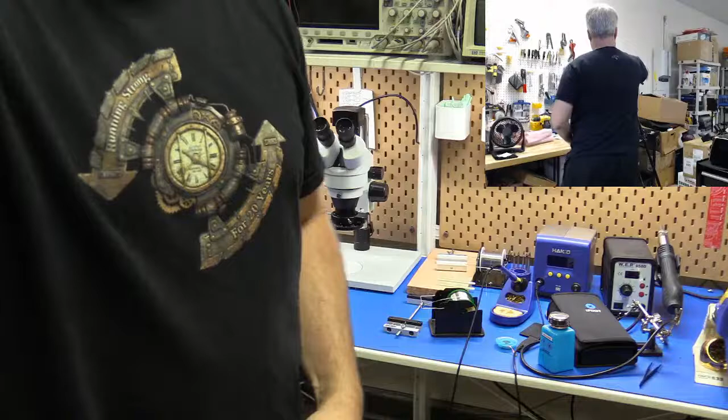So, I hope everyone can hear my rambling okay. I'm going to switch over cameras and we'll start unpacking. Okay. I still think it's kind of weird how you can see one camera and the other. Okay. There. Okay. Hopefully I'm coming through okay from the webcam, even though my back's to it.

This is the big box. Let's see how this goes. Okay. I just love packing paper. Yeah. Okay. Yes, so here we go. Bags of parts. They still look pretty good.

So the Printalyzer densitometer assembly is made up of 4 pieces. There's the top, the main body, the lower body, and the bottom cover. So this looks like the main body. Another bin of those. Oh, another bag of those. Yeah, this is the top piece. I affixed a graphic overlay to this to make the top of the device that you actually see. More of those. These are the bottom piece of the device. Plenty of those. And the base.

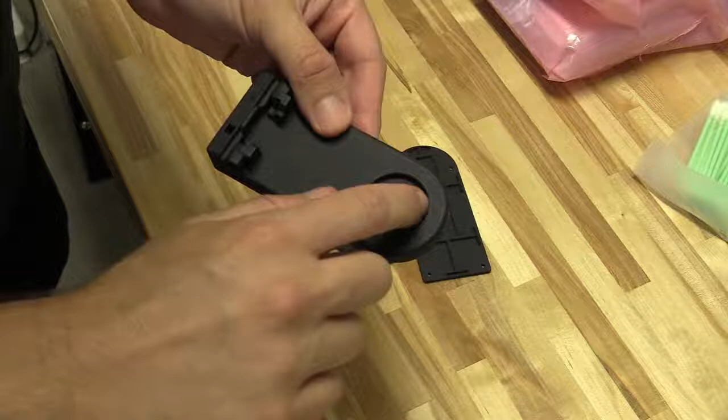So, over here, these are all the parts that make up the unit. One last-minute change that I made. If you maybe can't see in here, this is where these rings go around. I added a little inner groove in here. So when I was putting these together, the problem is the inside edge of this depression kind of had a little bit of a bevel just from the material process. And I was having trouble getting these things to actually fit all the way.

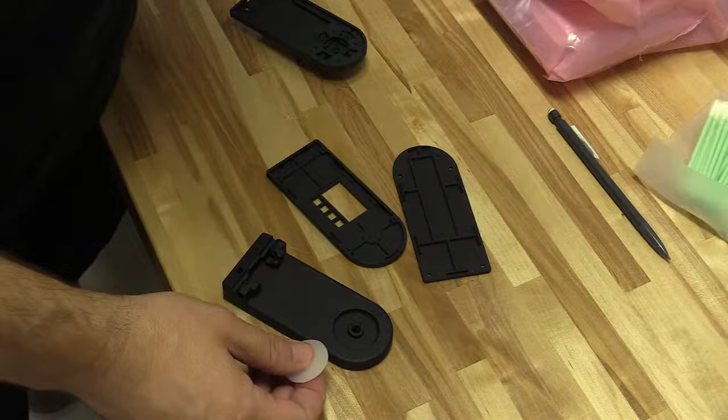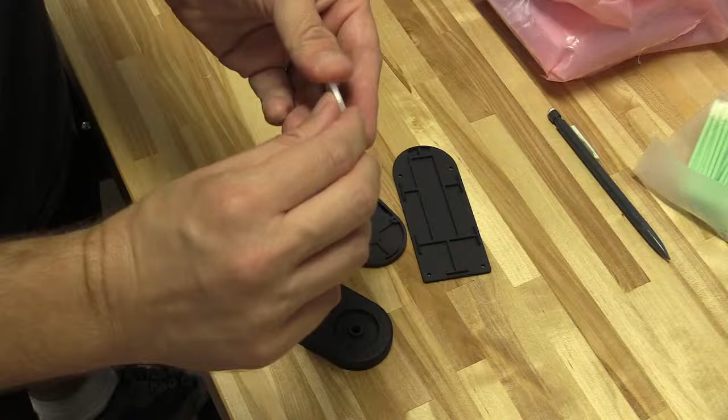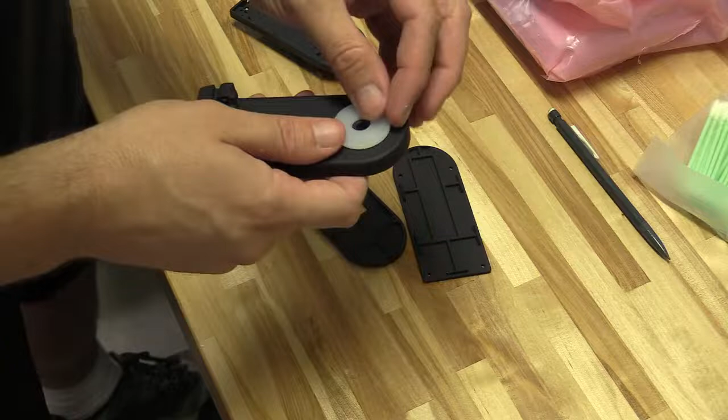So what I wound up having to do is come up with some sort of a way of sticking this on the end of a drill, spinning it around real fast with a file, and rounding the edge just to make it fit. And I didn't want to have to do that, so I added this little inner groove here, which looks good, that should hopefully avoid that problem. And we'll know for sure once I start to actually glue these together.

Okay, and then I also made these little pieces, the bottoms of some of the springs come through here. I made these a little longer and added a little pocket so I can blob some silicone in there just to help hold the bottom of the springs in. It's another last-minute change I made. So, let's see. So that goes together like that.

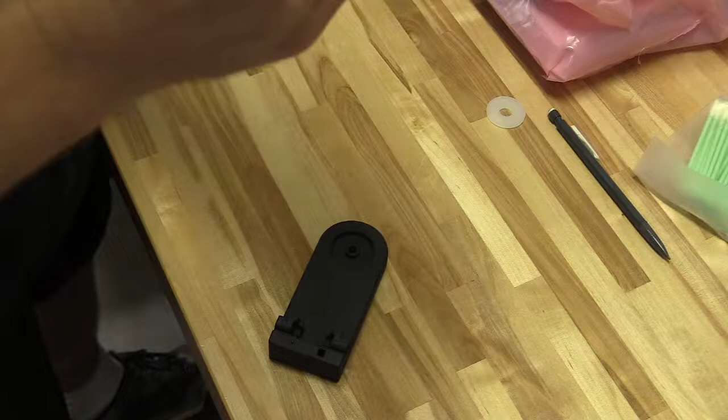Top goes together like that. Now, when I was going back and forth, driving myself crazy about manufacturing for this, some places would say something like, "We're okay if it's plus or minus 0.3 millimeters. We're not going to care about your problem if that's the case." Well, you do that in one direction on one part, another direction on the other part, and all of a sudden these pieces that are supposed to mate together overhang and none of the screw holes line up. So that's important. So this fits together pretty well.

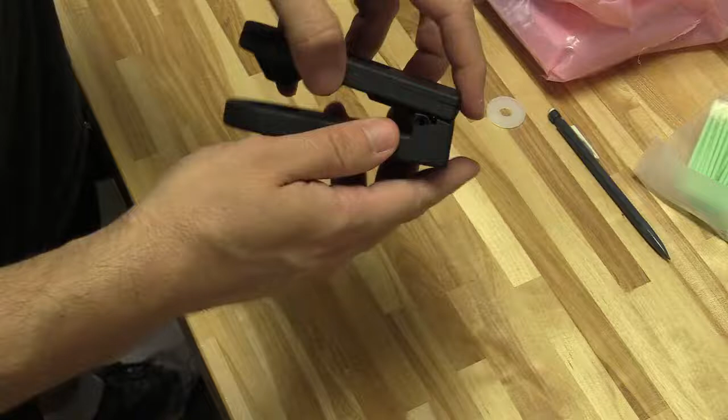I actually made a bunch of weird design kinks in here, these little features here and around here, so that this thing would rest down and kind of lock so that when it was closed it wouldn't have any side-to-side play. Very important if you want repeatable transmission measurements. So, big thing we need to find out now is do all the parts fit? That's one thing that's worrying me a little bit.

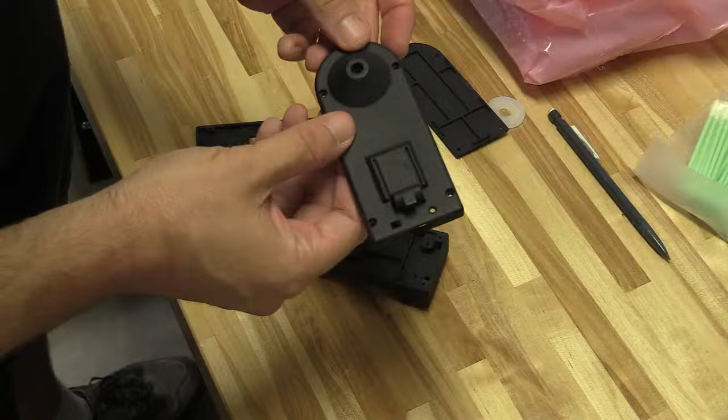So one thing that's always a challenge with these is getting all the tolerances on everything perfect. You have all these little screw holes, all these little bits and pieces, and everything has to go in just perfect, and you wind up iterating over and over again. Oh yeah, here's another thing that I did. I slightly thickened the amount of plastic between here and the inside of that pocket so I could use slightly longer screws. I discovered the screws I was originally using were too short. In the final pre-production devices, I used some washers to make up for that plastic being a little thinner. The final ones, I shouldn't need it.

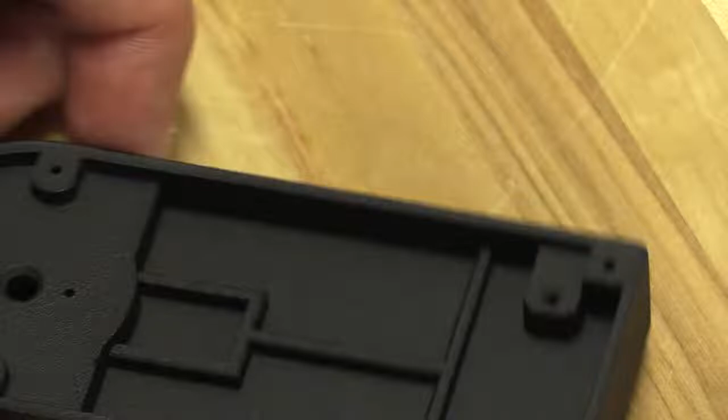But yeah, mostly what I'm worried about, let me zoom in, is, and I won't really know for sure till I start doing some assembly, whether these screw holes right here are actually big enough or not. If they're not, they're still probably big enough to tap. If I have to tap them, I can. I just hope I don't. The rest all look good.

So if you want to know why 3D printing is such a benefit to a device like this, first of all we have the whole hinge, but also the sensor cone right here. This isn't just a cone of plastic. It actually has these 4 channels on the side that come up to where the different LEDs are, and they shine down at a 45-degree angle to hit the bottom target, and that's much easier to do with 3D printing. And then in the middle, we have a stack with a diffuser and a UV-IR filter, and then the circuit board goes on top. So aside from a minor concern over those holes, which I can work around if it is an issue, and it may not even be an issue, this actually looks pretty good.

Of course, the one thing I'm always a bit nitpicky about is whether these will fit properly in here. They do around the edges. They might need to be pushed down a little bit. I'm a bit hesitant to push something in just because it may be hard to get it out. But I could actually try gluing one in. So let me go get one of the final rings.

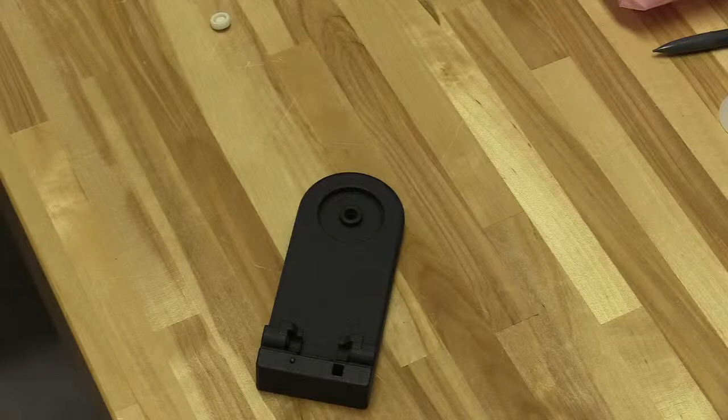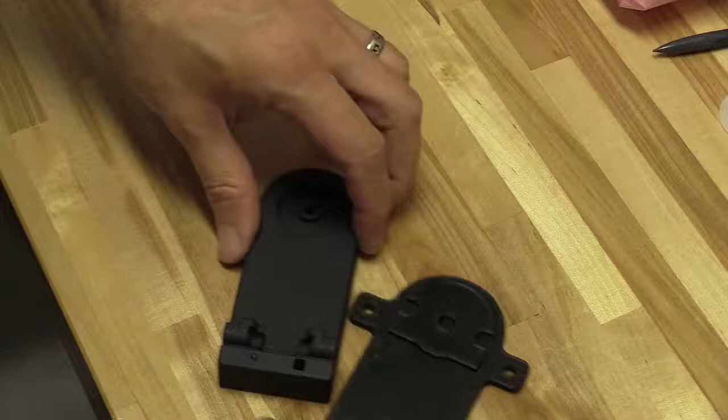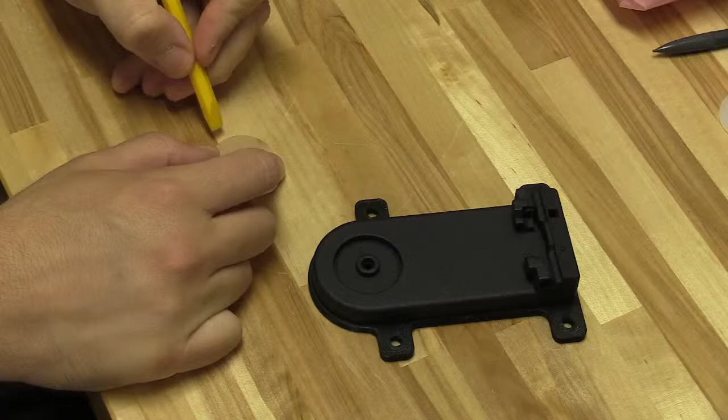Okay, let me zoom out a little bit. Okay. Let's... little jigs. In fact, I even made a jig specifically for this. Anytime I need to hold one of these devices in a specific orientation, I make a jig. So we've got this jig right here that's designed for this to sit on top, so I can bang on it and not have to worry. So, got a few things we got to do to put this together. Obviously, when I'm doing this for real, it's going to be done in quantity, in bulk. I'll have a whole bunch lined up, but we're just going to do one right now just to see how it fits.

Okay. So first we're going to do this outer ring, which is relatively easy. So this plastic here has two sides. One's completely matte, one's shiny. The idea is the matte side is up so we don't track our fingerprints. So this is going to be shiny side down. So to put the outer ring in, we just dab a little ring of super glue around there.

Take this, put it over, and then press it. Okay, that is not good. Run into this problem before. What the heck? Okay, that inner part is too big. Yeah. This is going to be a problem. It actually makes me wonder if the middle piece will actually fit too.

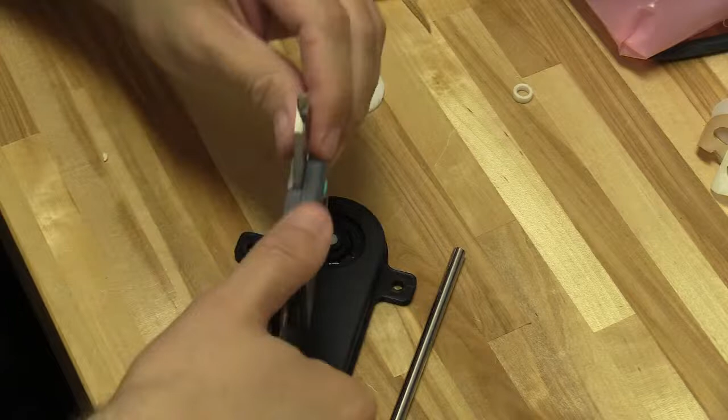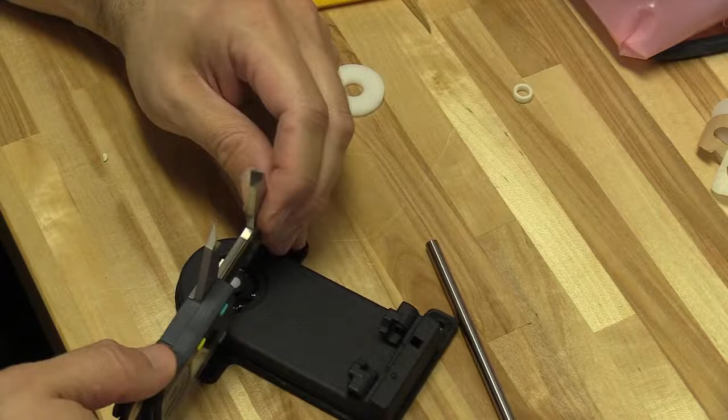So let's see. This ring is supposed to be, I guess, either 30 or a hair under. That's 29.8 on the outside, 10.05 on the inside. This pocket here is 29.63. Yeah, 29 and a half about.

So this is wider on the outside. And the in part here, that's 10.1, 10.2, and the inside of this is 9. Yeah, these dimensions are off. There's no way that's going to go in. So

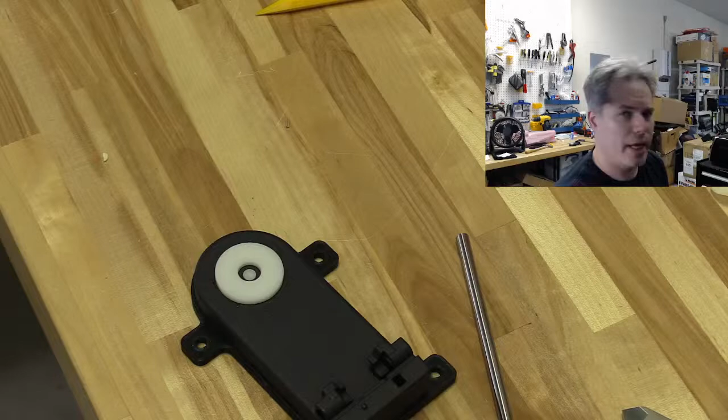Okay, so now what we're going to do is I'm going to bring up the actual CAD models for this thing, which should just take a minute because Fusion 360 likes to make you sign in fresh if you haven't used it in a while. So this will just take a few moments. Now it's going to send a code to my phone.

Okay, I'll be switching over to the computer desktop in just a moment. This isn't the computer I normally run the software on, but it's the computer I have in the lab.

Ultimately, though, this means two things that I would rather not be the case right now. It means that at least for the bottom half of the enclosure, I am not going to be able to start production for at least another week or two. The top I should have no problem with, but we'll see.

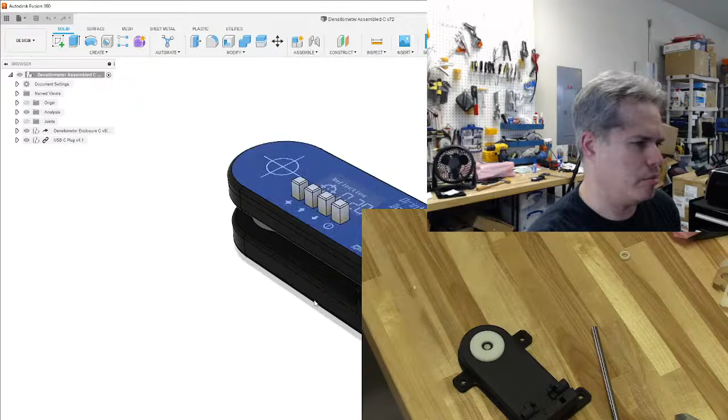Okay, so now we're over to the desktop. So, let me resize this so that it fits nicely. Let's see. Yeah. Shut off the video camera for now. Actually, no, we'll leave it on. We'll leave that on in the corner.

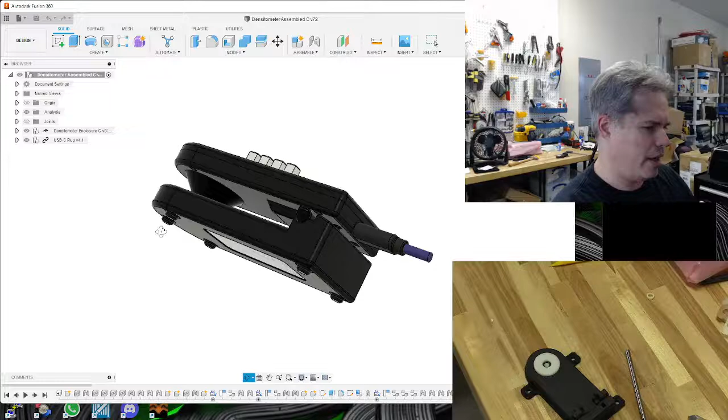Okay, so here's what we're going to do. I've got Fusion 360 up here, which is the CAD model for the device. I sort of have two versions of the model. This is the one that has all the parts in it. I also have one without the parts, but we'll keep this one for now. So we need to figure out what the dimensions are supposed to be and what they actually are.

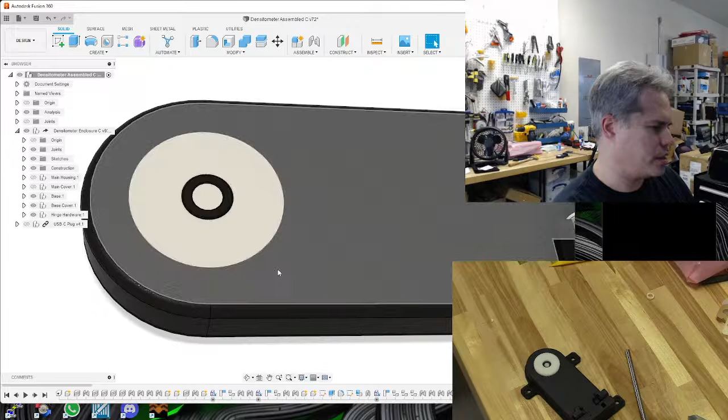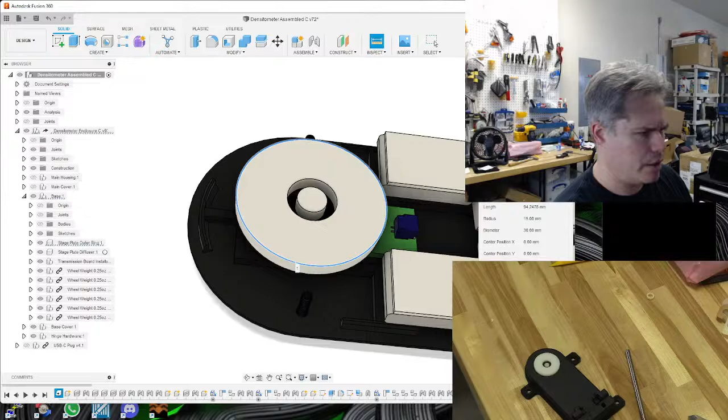So we'll take off a few pieces here, and this is really what we're caring about right now, this in right here. So in the base, if we take the outer body out, this outer ring is supposed to be a diameter of exactly 30 millimeters, and this inner piece, actually we don't care about the inner piece, that actually worked. So it should be 30 on the outside and 10 on the inside.

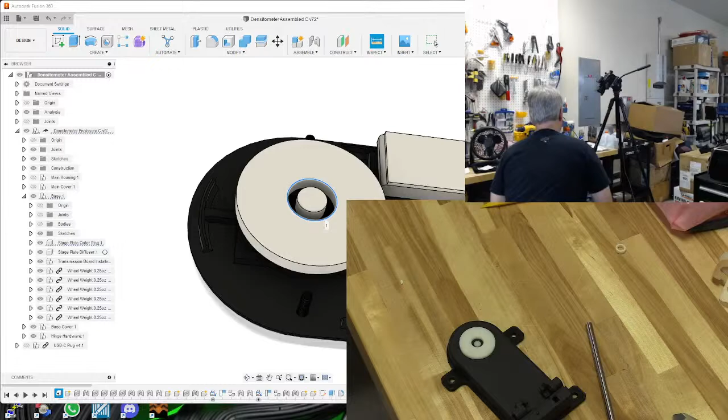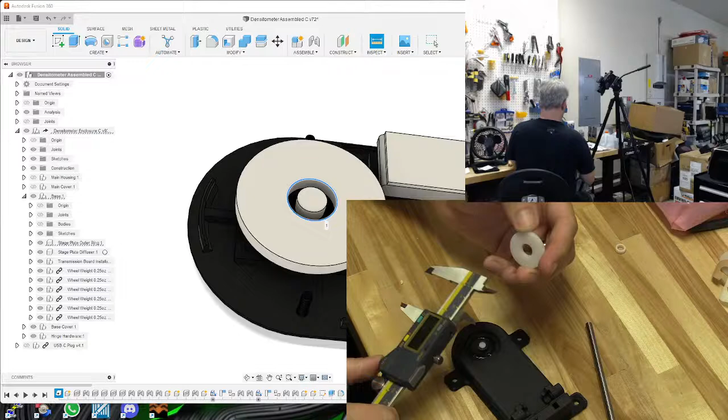So if we look at what we have over here, this ring was a hair under 30, about a quarter of a millimeter under 30, probably due to the kerf width of the process, and almost exactly 10. So that was okay.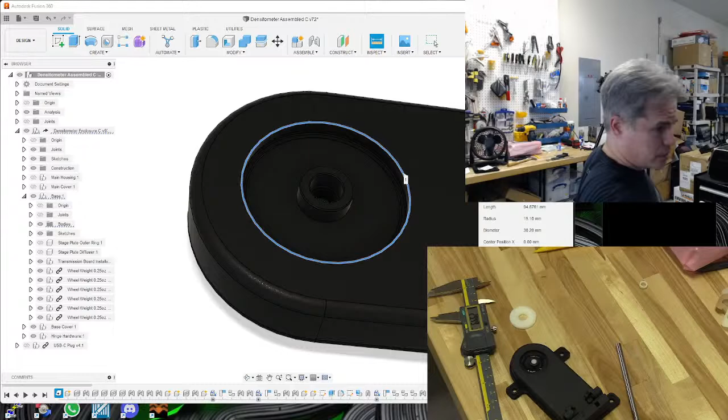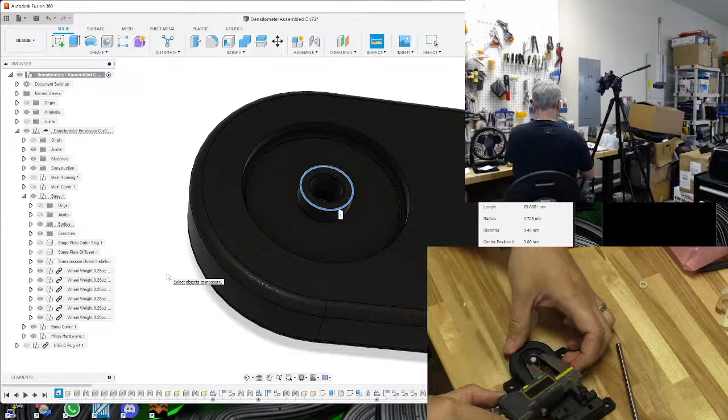Yeah, that's too small. And the inner piece here, the diameter of that is supposed to be 9.45. And what is it actually? 10.26. We got a problem.

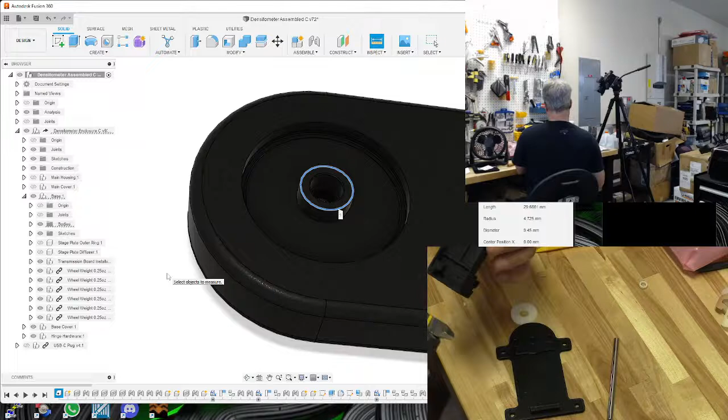While we're at it, though, I'm actually curious about those screw holes on the bottom that I spotted. But, you know, that's less of a concern. These are hard to measure accurately anyways. So, while we're at it, I'm going to want to measure all of these parts eventually. But let's do some basic other measurements just to see how things come along.

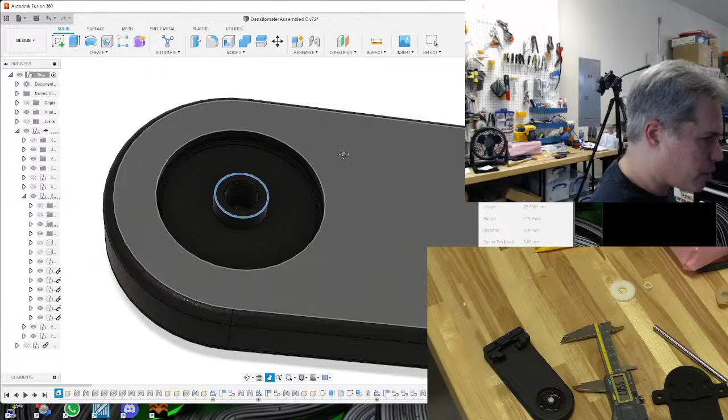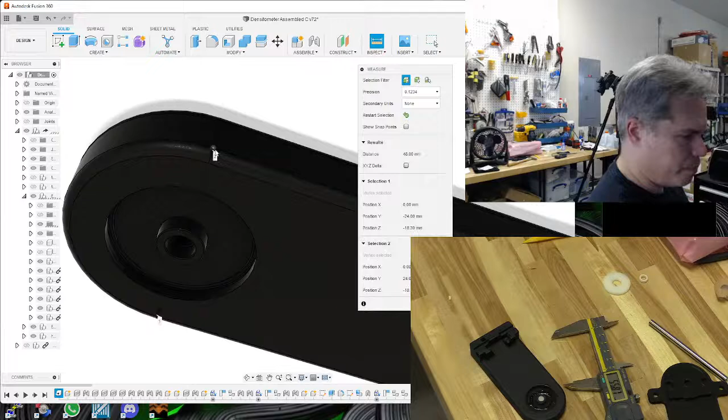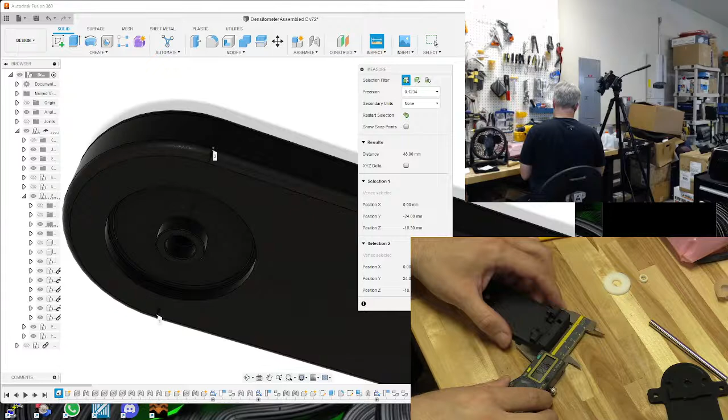So let's see if I can, yeah, collapse this a little bit. So now let's just check the other major dimensions of this part. So what we want to know is how wide is it supposed to be. So from there to there, that should be exactly 48 millimeters. What is it really? 48 and a quarter. Okay. That one being bigger isn't really a problem.

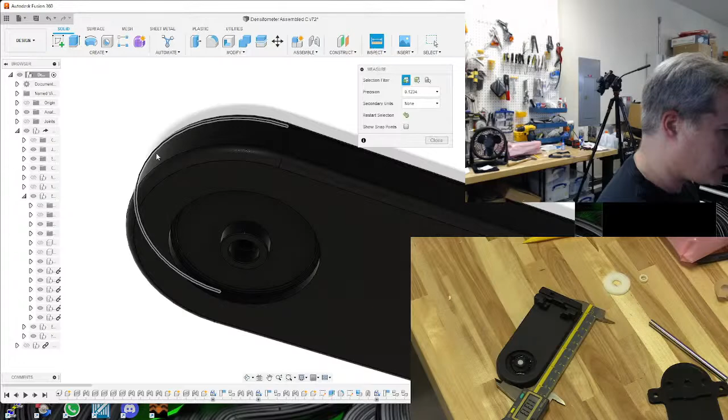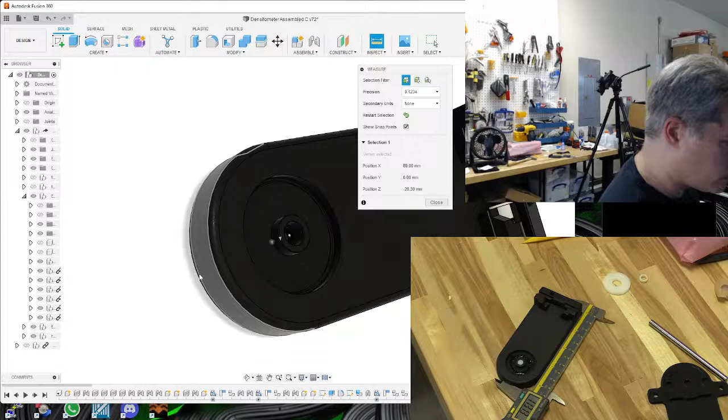And then this way is 113.13. This one is a little harder to measure. Let's see if we can. No, it's always annoying. There. If we do XY, yeah, 113. So it's a hair over in that dimension. But let me go get an existing unit, not a disassembled one though, and we'll see how it compares.

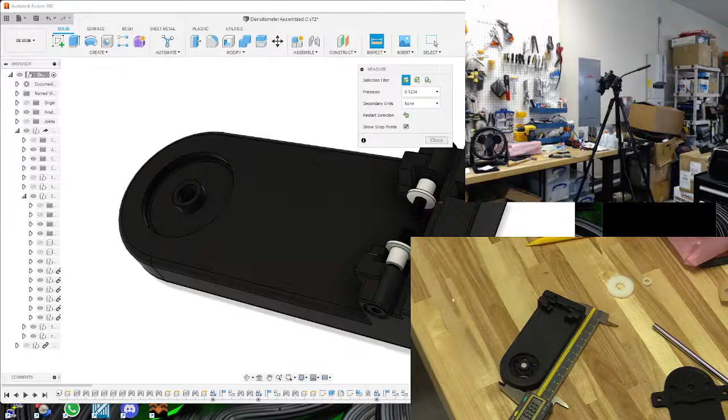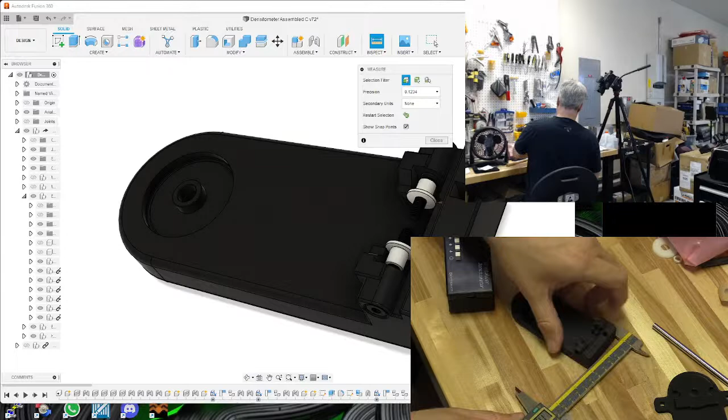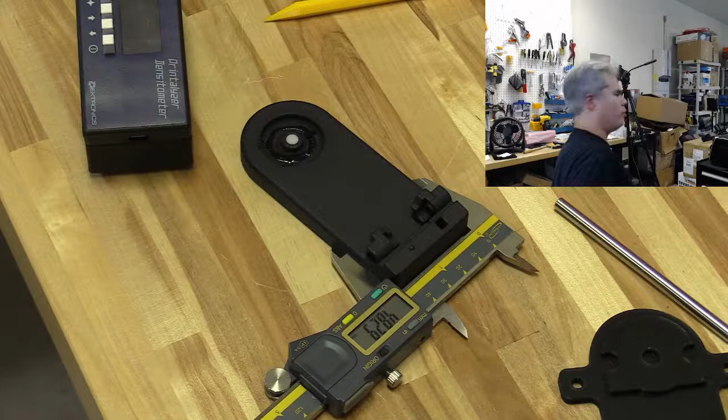Okay, so this unit is from the pre-production batch, and we're going to see how its measurements compare. So let me switch back. Okay, so it's supposed to be 113 long and 48 wide. So what are we really? So this one's 48 and a quarter, which is not good, but not terrible for that dimension.

And this one is about a tenth of a millimeter less. Not that big of a difference. And this dimension is supposed to be 113. It's almost exactly 113. Well, it depends on how well I line this up. It's kind of hard to measure these things fully assembled. Yeah, it's a little bit longer. That's okay. So, not that big of a difference in those dimensions.

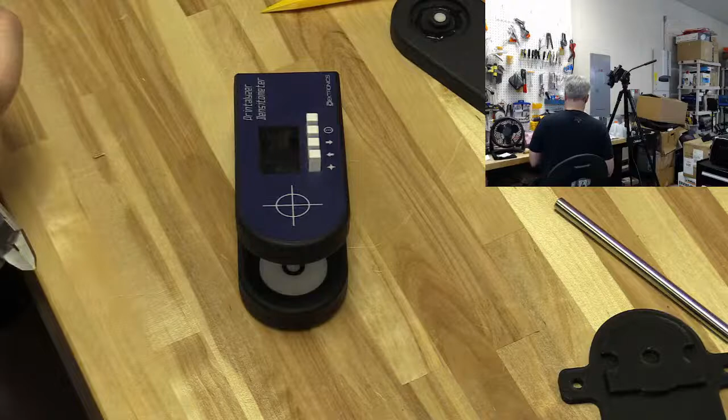But, yeah. So, just curious if this one fits any differently. No, this is an older run of the acrylic pieces. That's the same problem. Okay, so I'm going to need to deal with this. Probably shouldn't waste all your time on camera with it, but one thing we can attempt is to see if the circuit fits.

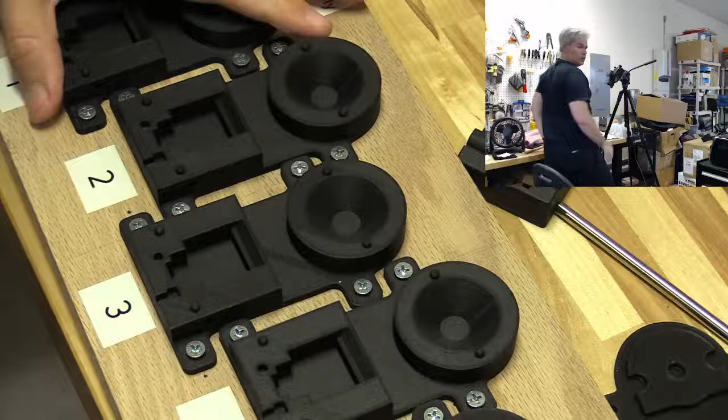So here we have a thing that I sort of threw together to help with assembly. This jig holds that nice and locked down, and I can stick a circuit board on top and we'll see how well it lines up. I could measure this. This should fit a 14 by 14 or 15 by 15 square. No, that's supposed to be 15. It's measuring a hair under. That might not be a huge problem. So, okay.

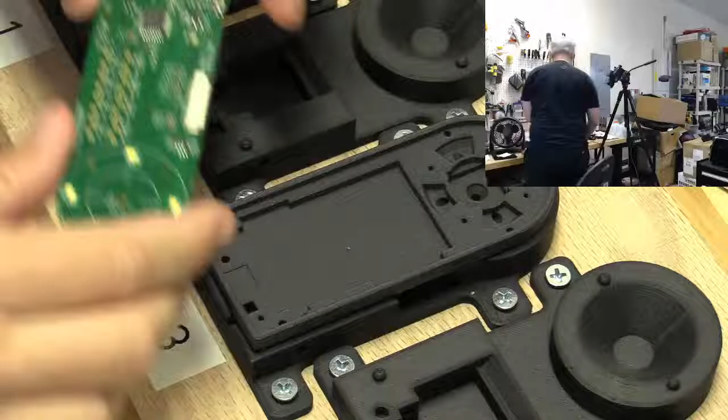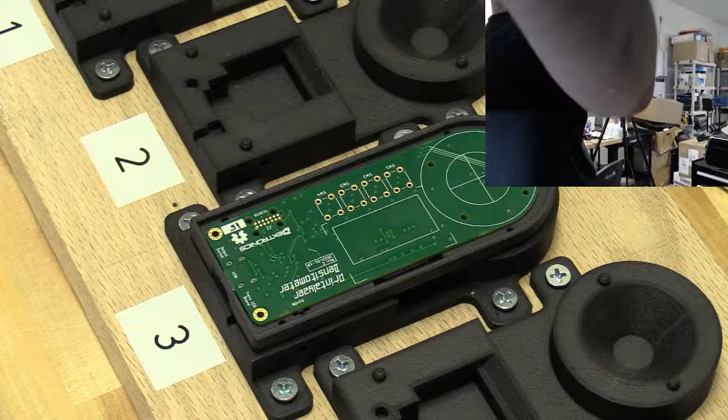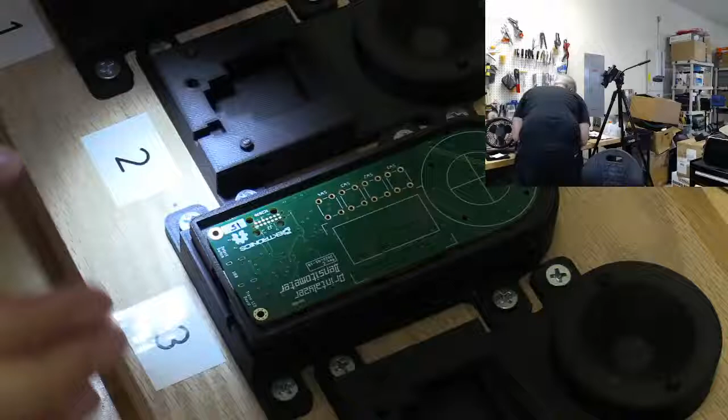So we have a circuit board here. This is what the circuit board for the device looks like. And what we want to find out is, does everything line up, particularly the mounting holes? So we're going to drop it in. Then I'm going to grab a light. And we're going to see. Okay, thank goodness. The holes do appear to line up. This is exactly what we were hoping for.

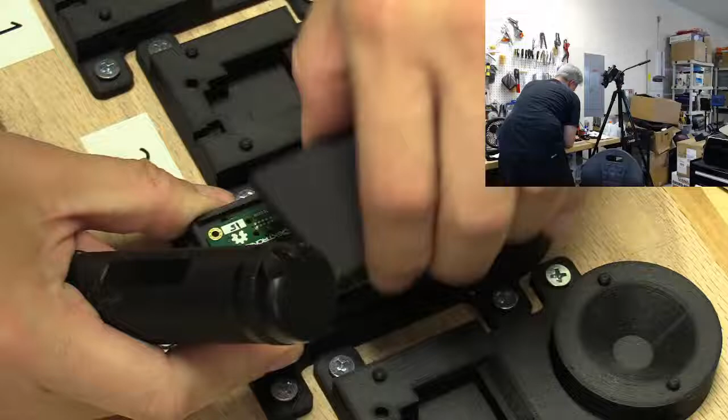There are no buttons on this one, but that's okay. I haven't soldered them onto this one yet. What's really just important is that all of these holes line up, which means I should be able to put it together. Okay, so I'm not currently planning on complaining about these top pieces, but that bottom piece is a huge problem. Let me take this circuit board out.

And one last thing with the bottom piece. Just going to see what happens if I try to put this in. This is what the transmission light circuit board looks like. This particular one isn't the final design, but the hole patterns are identical. And that's probably okay. I'll probably try this with a screwdriver later. But, yeah.

Okay, so I'm probably going to cut the stream here. So as you see, I now have all the parts, hopefully for the final assembly. But apparently one of the critical dimensions is a little off on the bottom half of the enclosure. That's going to cause a delay. I'm going to probably want to measure many more parts, and I'm either going to have that one piece redone or attempt to make a modified version of that acrylic piece. It was just so much back and forth getting all those dimensions so perfectly dialed in. It could take some iteration.